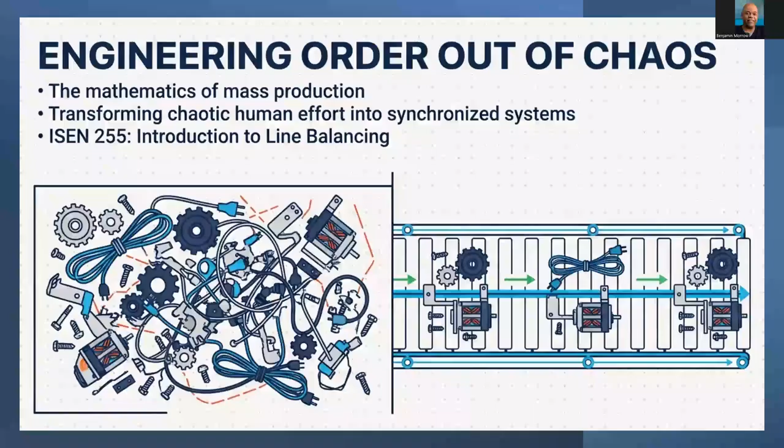Modern manufacturing relies heavily on assembly lines. Almost every mass-produced product you can think of, whether it's cars, laptops, smartphones, or appliances, every product you can possibly think of is built this way.

An assembly line breaks a complex product down into a bunch of smaller tasks, and each one of those tasks is performed at a workstation along the assembly line. Instead of one person building the entire product, we've got multiple operators who work sequentially, and each one completes part of that process.

You can think of the assembly line as a team working in sequence. Each worker passes a partially completed product to the next workstation. Because all the stations are connected, the overall production rate is controlled by the slowest operation, which we call the bottleneck.

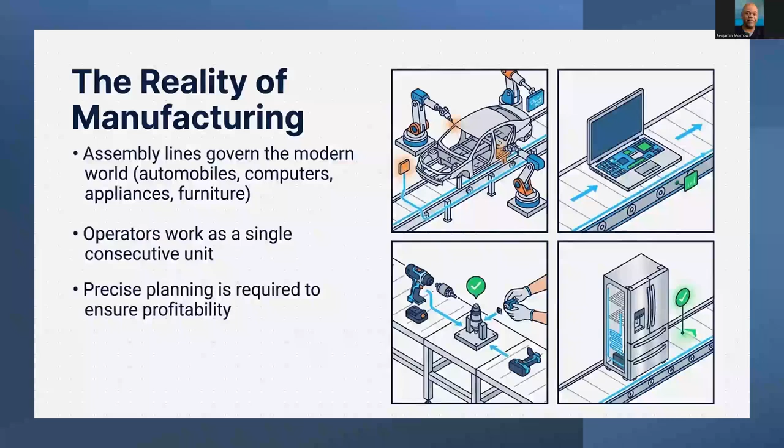If one station takes longer than the others, upstream workers may finish early and wait on parts, or downstream workers may run out of work. That's why planning and task assignment are critical. The goal we want to achieve as industrial and systems engineers is to distribute the work so that every station operates as evenly as possible. This planning process, deciding how work should be divided among stations, is exactly what we call line balancing.

One of the most important concepts in production systems is the bottleneck. When we have an assembly line, the entire system moves at the speed of the slowest operation. It doesn't matter if the other workers are faster. The slowest task will always determine the output rate.

Consider this simple example: worker A completes a task in 30 seconds, but worker B takes 60 seconds. Even though worker A is twice as fast, that product cannot move forward until worker B completes their work.

So what happens during that extra 30 seconds? Worker A essentially has nothing productive to do. They're simply waiting. This is what we call idle time, and it represents lost efficiency in the system. In reality, faster workers often slow their pace down naturally—it's just human nature to match the bottleneck, because the flow of parts forces synchronization in the process.

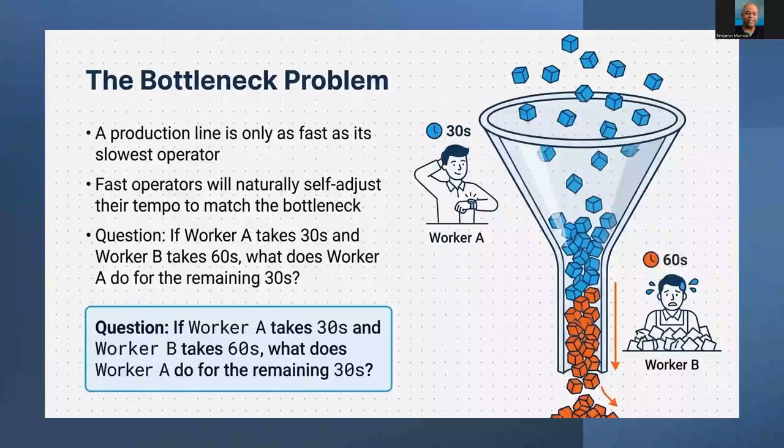This is exactly the problem that line balancing tries to solve. How does it go about it? In line balancing, we want to redistribute tasks and even out workloads across all the different workstations within the process, such that we minimize the idle time—the amount of time workers spend waiting. When the work is balanced properly, each workstation finishes close to the same cycle time, allowing the line to flow smoothly.

Now that we've talked about the bottleneck problem, let's look closer at the concept we put in place to solve it: line balancing. Line balancing is the process of determining the ideal number of workers and how tasks should be assigned across a production line. In other words, we want to distribute work so each workstation has roughly the same amount of work to perform. Why is that important?

If one station has too much work, it becomes the bottleneck. If another station has too little work, that worker spends an inordinate amount of time waiting or being idle. The goal is to balance the workload so all workers finish their jobs at approximately the same time each cycle. When that balance is achieved, products move more smoothly through the process, idle time is minimized, and throughput and efficiency of the production facility increase.

In practice, line balancing involves identifying all the work elements involved in producing a product, determining the proper sequence or precedence they must occur in, calculating the cycle time, and then assigning tasks to workstations efficiently. We're going to look at that over the next part of the lecture—walking through how engineers actually perform these calculations and design what we call a balanced assembly line.

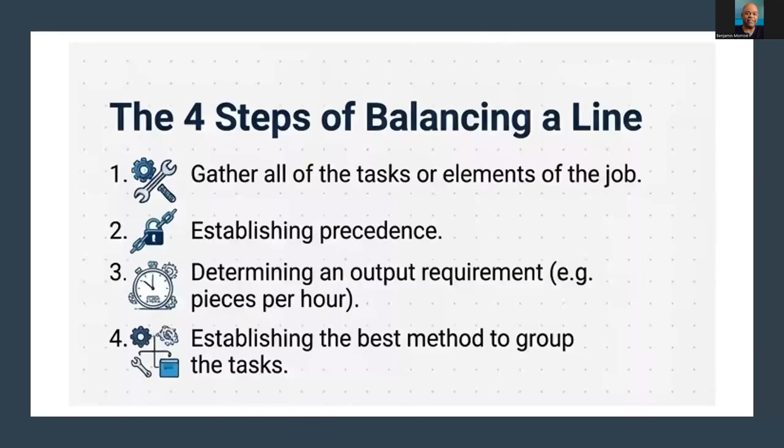When we talk about balancing a production line, we're usually talking about four basic steps. First, list all the work elements required to build that product. Second, identify the precedence relationships between those work elements—which task must happen before others. Third, determine the required production rate, which lets us calculate the cycle time. Finally, assign tasks to workstations so each station's workload stays within that cycle time and the line flows smoothly.

Line efficiency measures how much of the available time is actually used for productive work. Because workers must wait for the slowest station, some time is lost—this is what we call line delay. We have an efficiency formula: it's the sum of the standard minutes for the assembly of the product divided by the sum of the allowed standard minutes, and we usually multiply that times 100 to give us a percentage.

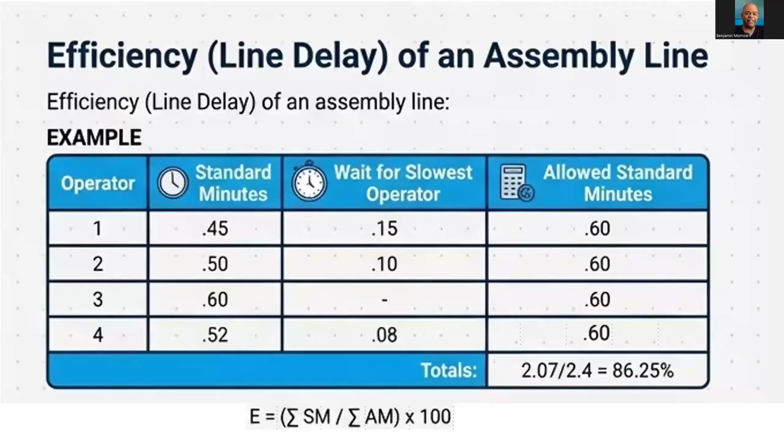Let's talk a little about some vocabulary involved. There are some key terms we need to define. The first is a work element, which is an individual task required to build any product. Then we have a workstation, the physical location where we perform those tasks. And then we have precedence, which defines the required order that tasks must occur in. Some steps must happen before others.

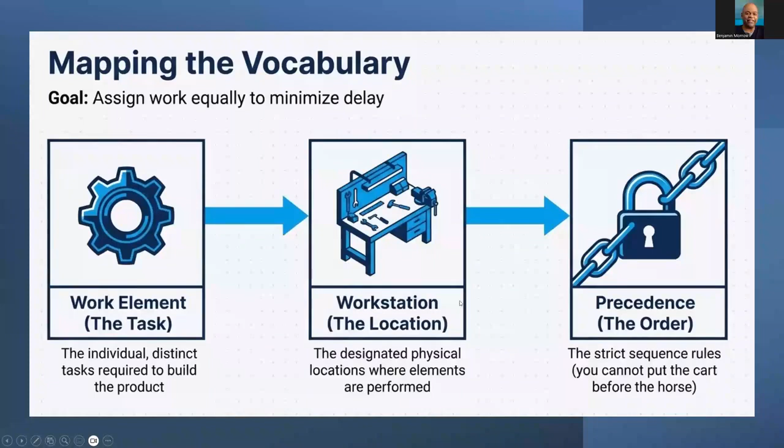So line balancing is about assigning those work elements to the workstations while respecting the precedence constraints. You can see that depicted in this diagram here.

Cycle time is the maximum time allowed at each workstation to meet demand. First we calculate the required production rate, which in this case is about 53.3 units per hour for 100,000 units per year. You have a demand of 100,000 fans, and the available time to work on those fans is 50 weeks, allowing for a couple weeks of vacation when the plant shuts down. We work 5 days out of those weeks, for one shift, or 7.5 hours per day. If we simply do the math, that's where we come up with 53.3 units per hour.

Our cycle time is equal to 60 times the efficiency divided by the hourly production rate. So we plug and chug: cycle time equals 60 times 0.96 divided by 53.3, which gives us 1.08 minutes. That means every 1.08 minutes a finished product must come off this line so we can meet our annual demand of 100,000 fans in our assembly line.

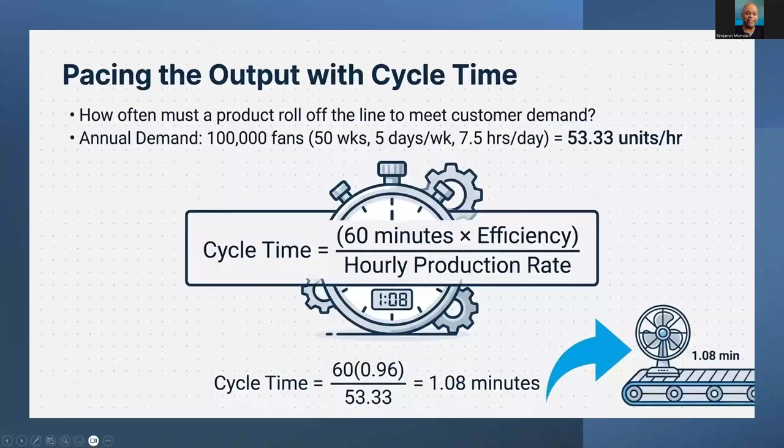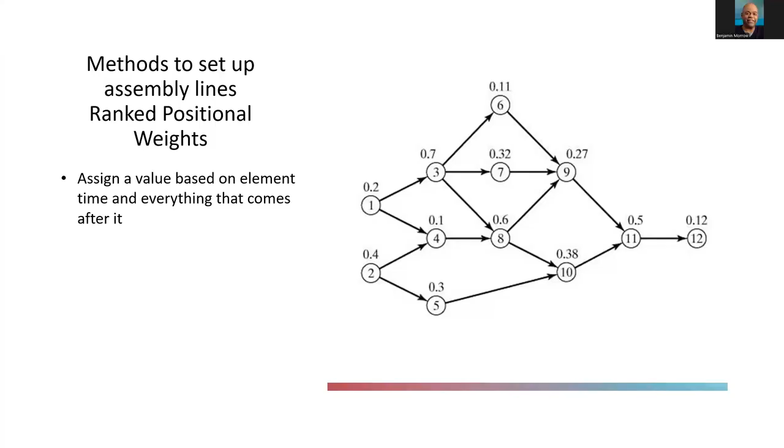One common method for balancing assembly lines is known as the ranked positional weights method, or RPW. Each task is assigned a positional weight, which equals the task time plus the time of all the tasks that must follow it. For example, task 12 has a weight of 0.12. Task 11 becomes 0.62, and task 10 becomes 1.0. That's because we're summing the tasks that must occur after it.

After ranking these tasks by positional weight, we can assign them to workstations while respecting the precedence they must occur in, and also the cycle time constraints we've calculated.

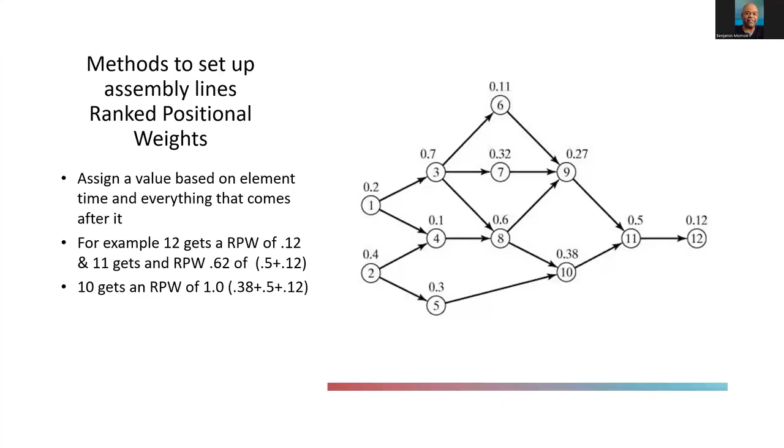If you sum all of the tasks or work elements that must occur in the assembly of this hypothetical fan, you have a 4-minute process. So the labor content of one fan is 4 minutes, which is the sum of adding all the task times together, representing the total labor required to build one unit or one fan.

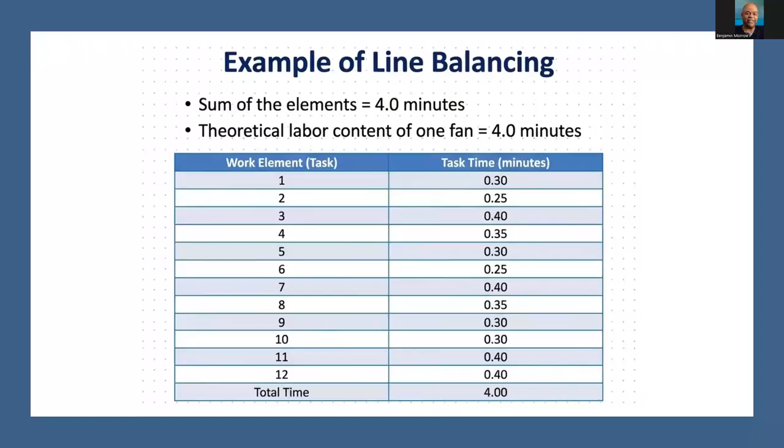Next, we'll use this information with cycle time and the precedence relationships we've talked about to determine how those tasks should be assigned to the available workstations.

We can estimate the minimum number of workers needed using the total task time and the cycle time. The formula is: minimum number of workers equals total task time divided by cycle time. In this example, we have a labor content of 4 minutes, and we've already calculated a cycle time of 1.08 for this assembly. That yields 3.7. We can't assign a fraction of a worker, so we round up, meaning we need at least 4 workers for this process.

With a cycle time of 1.08 minutes to produce the 100,000 fans needed to satisfy our demand, about 1 minute is actual work, and the remaining time accounts for movement between stations.

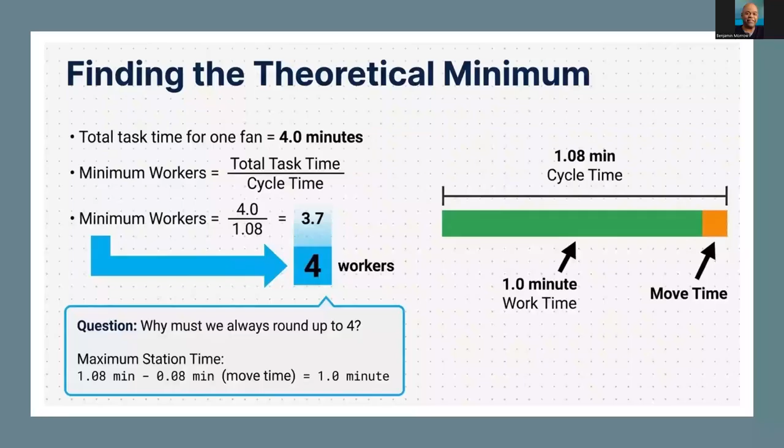We can visualize this using a precedence diagram. This precedence diagram helps us understand the order that tasks must occur in for this assembly process. Each node, or circle, represents a work element, and the numbers above each node show the task time. The arrows indicate the precedence, meaning one task must be completed before the next one begins.

Some branches show parallel paths where tasks can occur at the same time. We look at diagrams like this to help us see the workflow clearly before we assign tasks to different workstations. You can see the precedences that these operations must occur in.

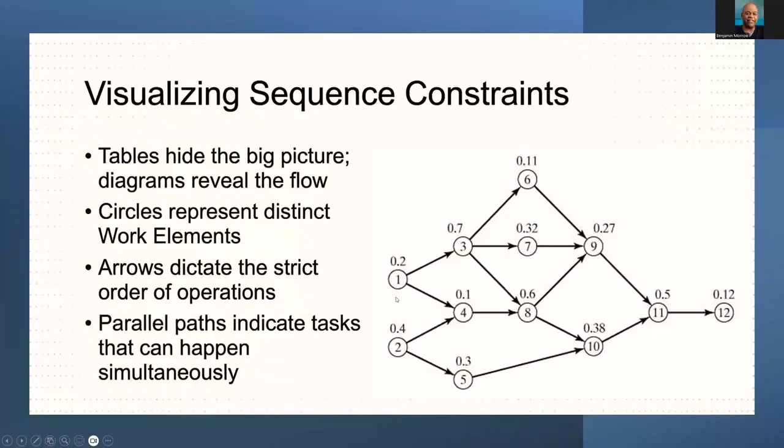For example, we've got task one with a time of 0.2 minutes that must occur before 3 and 4, where 3 has a time of 0.7 and 4 has a time of 0.1. You can see also that task one can occur, or does occur in this case, in parallel to task two.

Now to manually balance a line, again, we use this RPW method. It's one method we can use. There are others, but this is the one we'll focus on in this class.

RPW is used to prioritize which task should be assigned first. The positional weight equals the task time plus the time of all the tasks that follow it in that precedence diagram we just looked at. The task with a higher RPW are the ones that are more critical in our line balancing, so they are the ones we want to assign to workstations earlier. This helps make sure those important upstream tasks don't become bottlenecks later in the line.

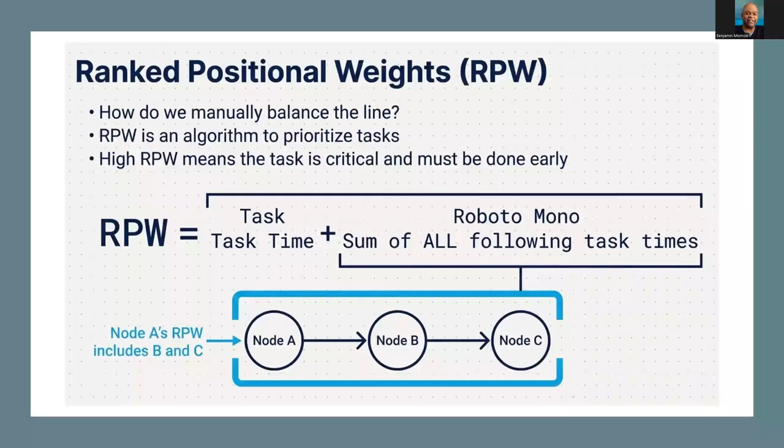We can calculate, in this case, let's say we want to calculate the RPW for element one. We would start with the task time for element one, which is 0.2 minutes. Then we would add the time of all the tasks that follow it in the precedence diagram. If we look at the tasks that follow it, those are given to us as 3, 4, 6, 7, 8, 9, 10, 11, and 12.

Now I have a question for you. Why wouldn't we include task 2, for example? Even though my slide in bullet 3 says task 2, that's actually an error. I've caught an error in my own slide, I'll have to fix that before I post this. If anybody wants to come off mute and give what you think is the reason for that, why wouldn't we include task 2 in computing the RPW for element 1?

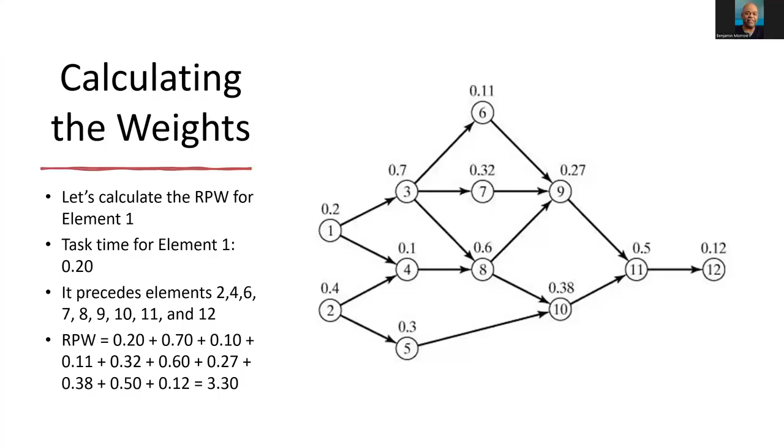Once we calculate the RPW for each one of our tasks, the next step would be for us to rank them from highest to lowest. As we calculated, the highest would be for work element or task one, which has an RPW of 3.3. So it's the highest, it would be first in our ranking, and we want to make sure we assign it to a workstation early.

So when balancing a line, we would select the task from the top of this list, starting with work element one and working our way down. That way we're respecting the precedence and the cycle time limits. You can see how that's done.

So the next work element, for example, would be work element three, which has an RPW of 3.0. Then element two, which has an RPW of 2.67. Again, you can work through that on your own and convince yourself of the accuracy of these calculations.

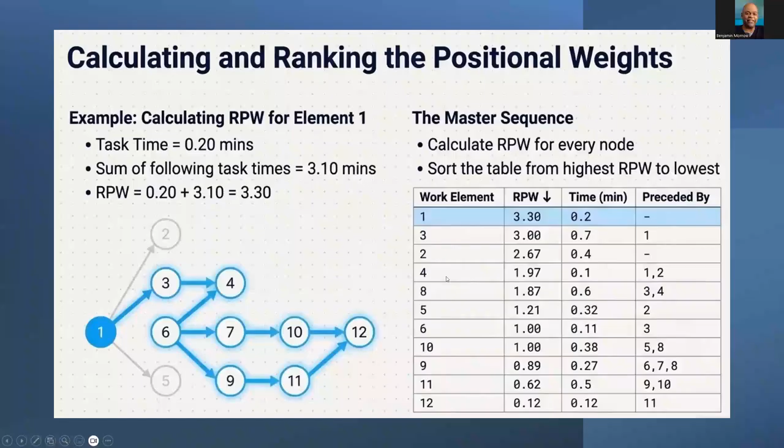After we have ranked our tasks by RPW, we can begin assigning them to workstations in order. We move down that RPW list, adding tasks to the current station. The key constraint is that the total task time cannot exceed the cycle time limit. We've got about 1 minute per station, which we calculated earlier, if we remove the travel time from station to station. So if adding these tasks would exceed the limit, then we need to skip it, or move it to the next feasible task.

So for example, station one has a work element there that takes 0.2 minutes. Then we have work element three has a time of 0.7. That yields a station time of 0.9.

We wouldn't add the next work element because that would push us over the 1 minute cycle time that we need. We would then move to work element two, to the next station, and continue the process. You can see workstation two, we have 0.91 as the station time there, and that's simply the sum of those times. And then workstation three, four, and five.

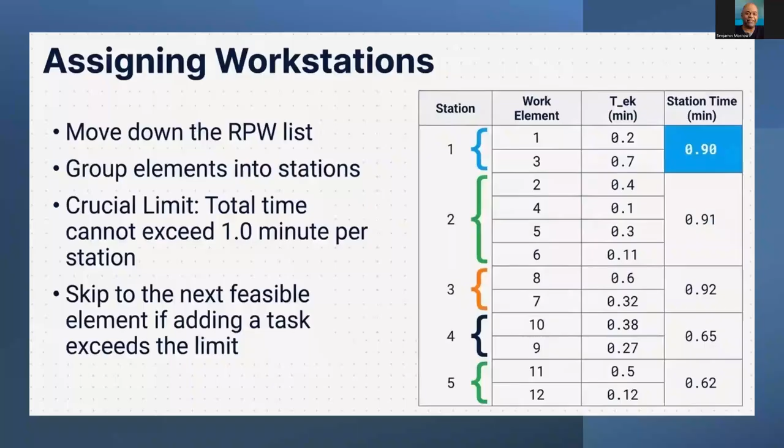So the bottleneck station is 0.92 minutes, which sets the pace for the line, and we saw that earlier here. That's where we get the 0.92, and we can see that's at station 3. That's our longest process, or longest time, for our different stations, the 5 stations that we needed.

So now that we have our bottleneck station of 0.92 minutes setting the pace of that line, we can use our efficiency formula, and we come up with about 87% efficiency, just plugging in our numbers. So the question we want to answer for ourselves is, is 87% good enough? Or should we rebalance this line? Should we try and do even better?

We accept that 87% if current demand is met and if it offsets the relatively high cost of redesigning our workstations, because that work does cost the company something to do. If we want to rebalance, on the other hand, we have to think about the fact that labor is expensive and that the expected future demand increase may require some new machinery. In that case, we may need to look at rebalancing our line.